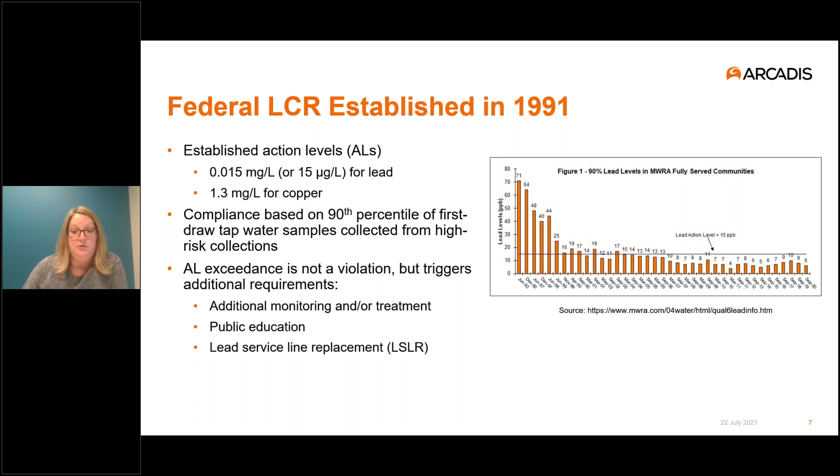It's been a really long road to get to the revisions. Really starting in 2004, there's been a national focus since the EPA decided to assess lead levels across the country following the detection of lead levels in Washington, D.C.'s system. Before Flint, there was Washington, D.C., and that was a very big crisis with lead in the water as well. Since then, we've gone through many stakeholder processes and additional analysis to better understand how we can improve this rule.

So now the revisions are finally here. They were officially released in the Federal Register on January 15th of this year. There is some uncertainty around the current administration - they are opening a comment period and doing some additional review, so some of the implementation dates are not completely clear right now. We'll go through that on the next couple of slides and show what we're anticipating based on the dates that have been published. Regardless, it's not expected that the rule will be pulled back and reverted to the original rule.

So I do want to stress that there's a lot in this rule. There's a lot to get started on, so don't wait to begin implementation of some of these things.

Going back to the overall objectives of why EPA updated this rule: they wanted to improve public health through a more proactive and holistic approach, focusing on earlier action to reduce risks, largely around lead in drinking water versus copper. In addition, the revisions improve transparency and communication to better protect children and families and give them the materials to better protect themselves from the risks.

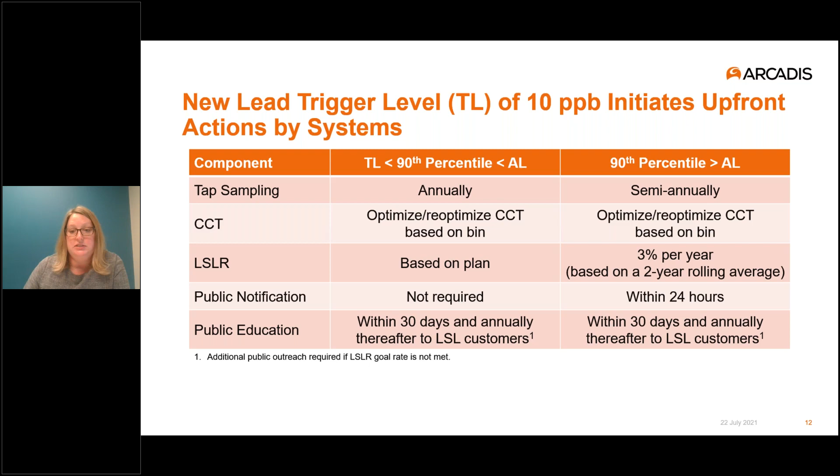It also introduces a trigger level of 10 parts per billion that wasn't in the previous rule. You can see that on this slide here. That trigger level is designed to compel systems to take more progressive actions before exceeding the action level. It can include more tap sampling, optimization or re-optimization of corrosion control treatment, full lead service line replacement based on a predetermined goal rate, an annual notification to customers about your lead service line replacement program, and opportunities to replace their lead service line. We'll talk about those in more detail as we move through the presentation.

Another big change is around notification. Given that there can be adverse health effects as a result of even short-term exposure to lead, EPA has changed 2 components. First, exceedance of the lead action level now triggers a Tier 1 public notice. So all systems must provide notice to all persons served by the system within 24 hours, similar to an E. coli situation or other acute health risk.

This is a little bit of a challenging message to communicate to the general public. The exceedance is not based on a single value, right? It's based on the 90th percentile, and 15 parts per billion is not necessarily a health-based level. So there will be some samples potentially above that level that were collected earlier in the monitoring period.

So to close that gap, EPA is doing 2 things. First, the notification has to be performed within 24 hours of receiving and calculating your 90th percentile lead level. So as soon as practicable, after you collect your data and calculate the 90th percentile, that's when that has to go out, not necessarily at the end of the monitoring period.

Second, you must notify persons served by that tap sampled as soon as practical, but no later than 3 days, if the result is above the 15 parts per billion action level, and give them information so they can take action to reduce their risks. These are really short turnaround times on notification, so it's recommended that systems prepare in advance, including having notification templates complete and deciding how you're going to distribute the materials if needed.

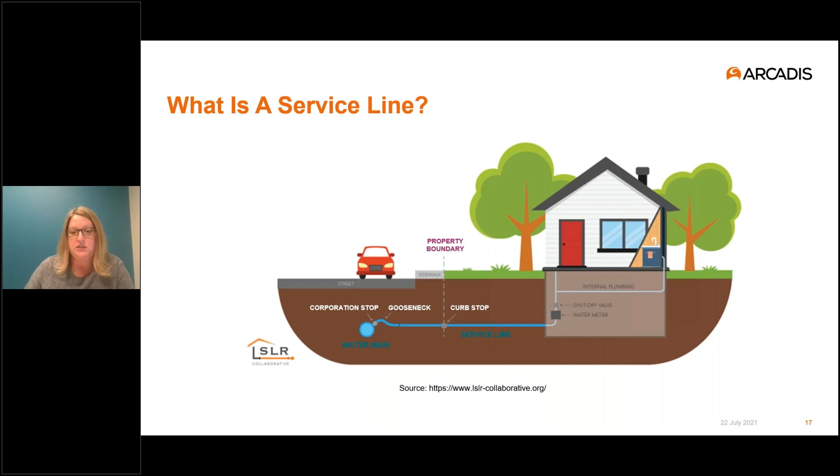So now that we've gotten the service line components straight, I want to dig a little bit deeper into the lead service line definitions in the new rule. Generally speaking, the service line is defined as the pipe between the water main and the building inlet.

However, for inventory and replacement purposes, this is how we're understanding the different material definitions. There are 4 categories. A lead service line is defined as a lead pipe anywhere between the connector and the interior plumbing, not including a lead gooseneck or connector. A lead status unknown service line is an unknown pipe material anywhere between the connector and the interior plumbing, again not including the connector or pigtail.

A new category in this new rule is the galvanized requiring replacement. This is a galvanized service line that is currently or ever was downstream of a lead service line as defined here, so that is not including a lead pigtail or gooseneck. And then finally, we have the lead connectors: the goosenecks and pigtails with non-lead or galvanized pipe between the connector and the interior.

So in what cases does replacing these count toward your replacement rates if you're triggered into replacement through an action level violation or exceedance? The lead service line only counts if all of the lead is removed, public and private side. If you just remove the public side, that's not counted towards your rates. Lead status unknown counts if all lead is found and removed, or if you determine there is a non-lead pipe. If you remove a galvanized line and any preceding lead, that counts as a replacement for the galvanized requiring replacement. However, replacing just the lead connectors does not count towards the replacement rate because, again, these are not defined as lead service lines.

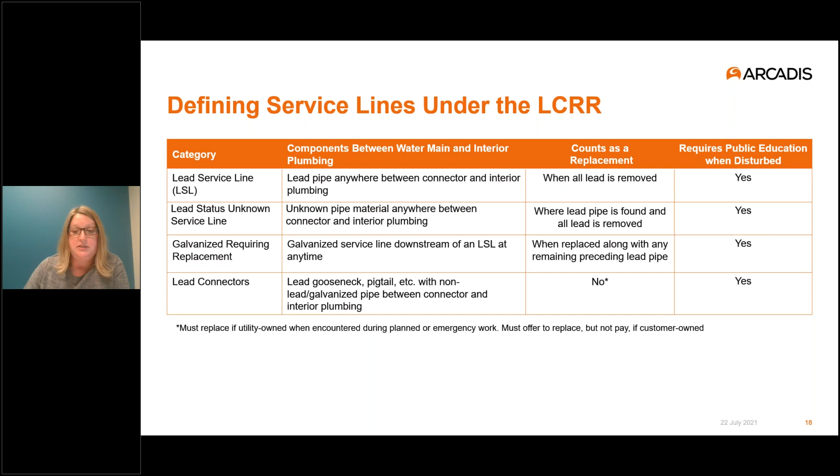All right, so we've come to our first poll. I want to see how many known lead service lines are in your system -- if you have none, 1 to 500, 500 to 2,000, or 2,000 or more. We'll give folks a moment to respond to that.

And while we're waiting for answers to come in, I have a question here. Do schools built after the 2014 Reduction of Lead in Drinking Water Act effective date require sampling as part of this rule? That's a good question, and the answer is no. If you have a brand new school constructed after the 2014 date, or if all of the plumbing in a school, including the service line, was replaced after 2014, you do not have to sample that school or facility.

Great, thank you. Eric, how are we looking with the poll? Do we have all of our answers in? Yeah, we have a good percentage here, so I'm going to go ahead and close that, and then I'll show the results.

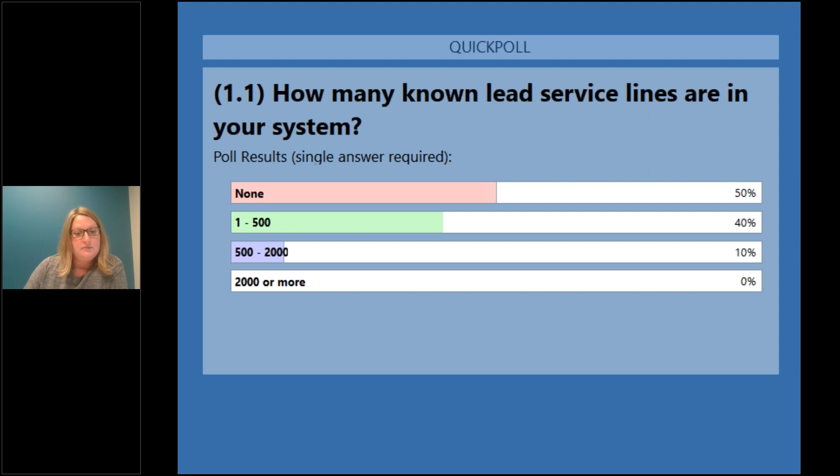Okay, so it looks like we have none at 50%, 1 to 500 is at 40%, and then 10% are 500 to 2,000. All right, so not so many lead service lines. That's good.

All right, so the first area I want to talk about with this is the lead service line inventories that are required. Under the final rule revisions, all systems must prepare a publicly accessible inventory of lead service lines and service lines of unknown materials, or demonstrate the absence of lead service lines by historical record or physical examination. The goal of this is to improve the system's ability to inform the public about the potential risks of lead and allow customers to take action to better protect themselves and their families.

The actual format of the inventory itself is flexible. It can be a list, a table, or a map. It does need to include some sort of location identifier. This doesn't necessarily have to be the exact address, but it does need to have cross streets, something that your customers can look at and understand if their house has a lead service line, or for example, a renter.

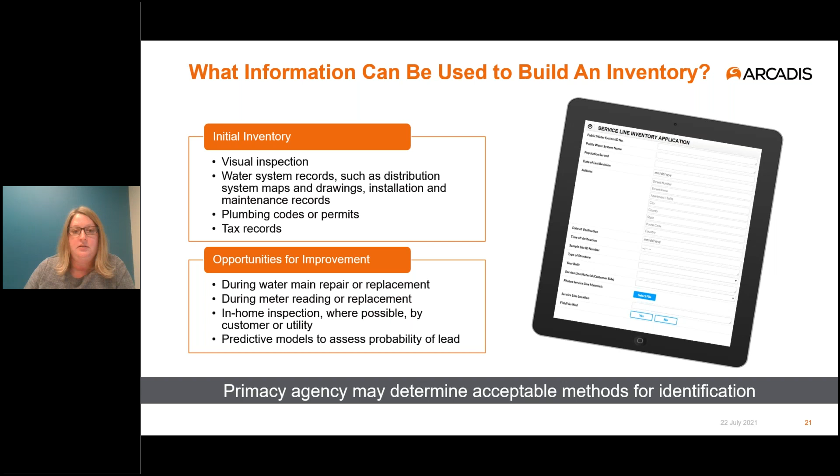If your system has any number of lead service lines, galvanized requiring replacement, or lead status unknown service lines, you must also develop a full lead service line replacement plan and submit that at the same time as the inventory, which right now is anticipated to be September 16, 2024.

The lead service line goal rate is something that's agreed upon with your primacy agency, so OEPA. Keep in mind, submitting that plan right before the deadline with no interaction with the state is not feasible, so you want to get the communication going sooner than that. Also, your EPA regional administrator may step in and adjust the rate, including setting a higher rate where they determine that it's feasible, even after the states have primacy.

Procedures to conduct full lead service line replacements: you want to know how you will coordinate with your customers prior to replacement, who is going to conduct the replacements—are you going to hire a contractor, or are your crews going to go out and do these themselves—and how they will be completed. There's a number of different methods for replacing lead service lines, so having a good idea of what will work in your system is good to know beforehand.

Medium and large systems need to have generally a recommended lead service line replacement goal rate in the event that a trigger level is exceeded, and that has to be approved by the state. This is especially important if you think your system might be at risk of exceeding the trigger level of 10 parts per billion. There are a couple of systems hovering right below the 15 parts per billion level, so they're not triggered into any action under the current rule, but when this takes effect, you may be triggered into it. So it's good to know where you stand.

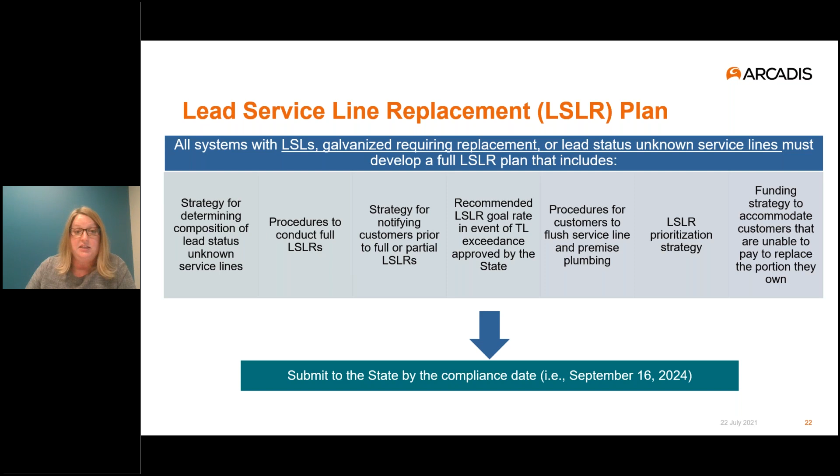There are 3 other significant changes to the current rule. First, test outs are no longer allowed. Under the previous rule, systems that exceeded the lead action level and were required to conduct replacement could collect a sample directly from the lead service line, and if it came back at or below the action level, it was considered replaced through testing. This practice is no longer allowed under the new rule.

Second, partial replacements are allowed only during emergencies or where the customer is unwilling, unable, or unresponsive, as part of infrastructure improvements such as a planned water main replacement. EPA is really discouraging this by not allowing partial replacements to count towards your goal or your mandatory replacement rates. They're hoping systems will make a good faith effort to coordinate with property owners to reduce the amount of partial replacements in the system—they really want to get that whole lead service line out. If a partial service line replacement is completed, you need to keep a record of the unreplaced portion in your publicly available inventory and continue outreach to those customers.

Another change is customer initiated replacement. This means if the customer replaces the private portion of the lead service line, the system is responsible for replacing the public portion within 45 days of notification of the replacement. The system can extend this up to 180 days to account for weather or resource related limitations—for example, if they get notice in December going into a hard winter—as long as they notify the state and work with the primacy agency.

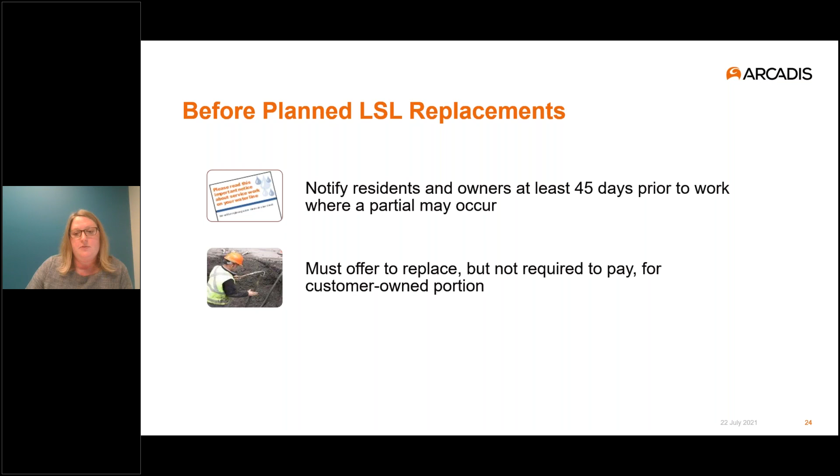Several other activities need to be completed when any replacement occurs for lead lines. The system has to provide education around potential for elevated lead risk mitigation, such as daily flushing procedures to remove particulate lead, high velocity flushing like we described earlier with that 30 minutes with all the taps open. They must also provide a pitcher, filter, and replacement cartridges for 6 months, and instructions for use immediately after replacement.

That's typically before the water is turned back on. Instructions on how to use the filter and replace the cartridges, and in the case of point of use devices, or like the Brita filters that attach right to the faucet, instructions on how to install those. There are some slight differences in timing on these, but generally this must be completed before the replacement is complete and before the water is turned back on. The only exception is when the system learns that a customer-initiated replacement where the system-owned lead service line was left in place occurred within the last 6 months. Then you need to complete within 24 hours of notification from the customer.

In addition to those, the system must also offer to collect a follow-up tap sample between 3 and 6 months after completion and provide results to the consumer. The tap sampling protocol for this follow-up sample is up to the system to determine, so this doesn't have to be that first draw compliance sample. Following this, you should update your inventory, and in the case of full replacements, update your sampling pool if needed, if that was a site included in your sampling pool.

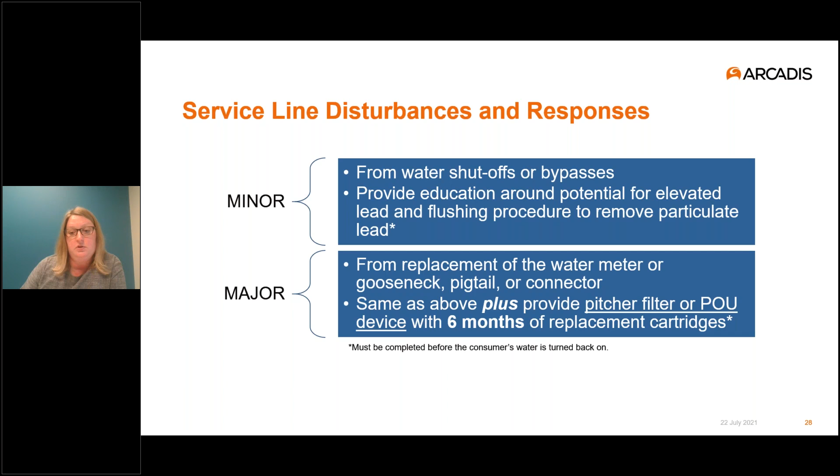So now I'll switch over to tap sampling. We've had quite a few changes in the new rule around tap sampling, and tiering is one of the biggest changes I want to talk about here. As you can see, EPA revised the tap sampling criteria to include 5 tiers.

This gives priority to the highest risk lead sources. There are some differences between community and non-transient, non-community systems. I'm going to focus on community systems for the purposes of this presentation. So tier 1 and tier 2 focus on the highest risk sites: single family structures and multifamily residences served by lead service lines.

The next tier is brand new for this rule. It includes galvanized service that is or ever was connected to lead. There's a slight difference here for sampling, as EPA also allows sampling for galvanized lines that are currently or known to be connected to a lead connector. So even though that doesn't count in your lead service line replacement, for sampling purposes, if it is currently connected to a lead gooseneck or pigtail, you can use that for sampling in tier 3.

Tier 4 are now single family structures with copper pipes with leaded solder installed before the effective date of the state's lead ban. This is an expanded definition compared to the previous rule, which included copper with leaded solder installed only between 1983 and 1986. So this is a bigger pool of sites.

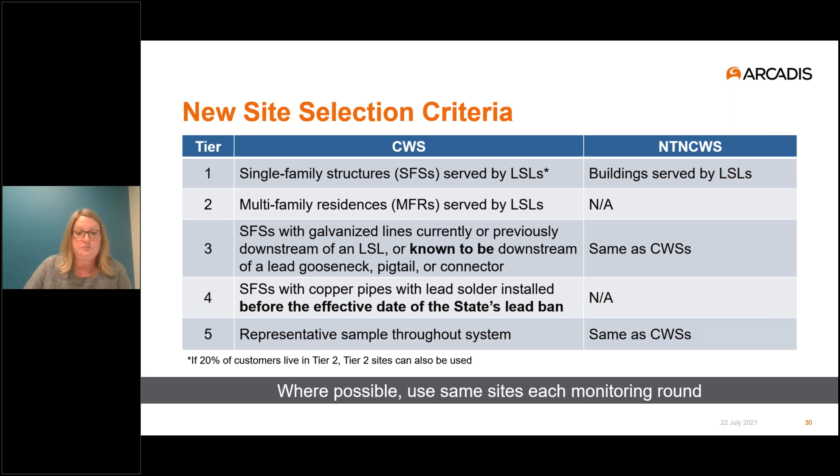Moving over to the new protocol, EPA did finalize modifications with respect to a few action items. First, systems are not allowed to direct any customers or samplers to conduct pre-stagnation flushing or to remove or clean the aerators prior to collecting a sample. I know this was standard practice in some cases to remove the aerator to get the sample - that is not allowed.

There's also a requirement to use wide mouth bottles, specifically greater than 55 millimeters at the mouth. Initially there was some confusion here - a lot of utilities were measuring their bottles and coming up with about 50. EPA has clarified this and says that this 55 millimeters can be the outer diameter of the mouth.

While the EPA does view galvanized lines in tier 3 as lead service lines for inventory, disturbances, and replacements, it does not view them as lead service lines for sampling purposes. So a little bit of complexity here. For tier 3, 4, and 5 sites, you'll continue to just collect that first liter and analyze that for both lead and copper.

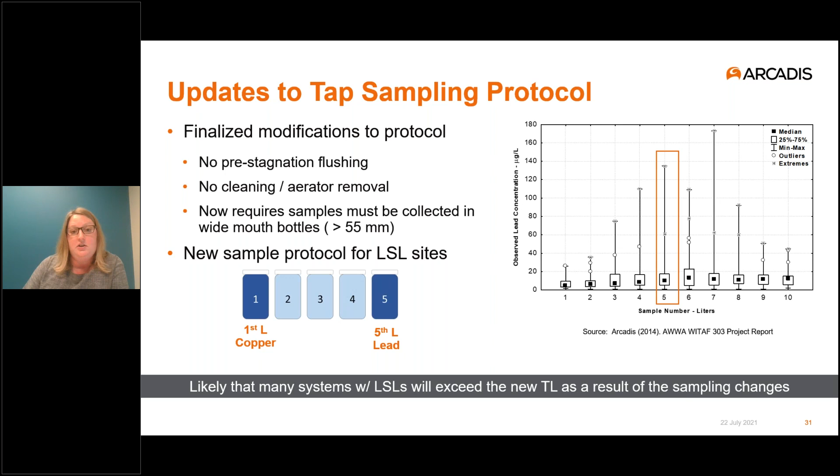This could have major impacts for a lot of systems, triggering you into some of the actions that we've already talked about in this presentation. It's really important to take a close look at your data, close look at your site, and try to understand where you'll fall.

So briefly, I also want to talk about the compliance calculation. Many of you are used to the 90th percentile calculation, but there's a couple strict instructions in the new rule for doing this. For a system where all compliance sites are tier 1 and 2, you're using all of the sites in your calculation. This is the same if you have only tier 3, 4, or 5 - you use all the sites in your calculation. It gets a little more confusing if you have a mix.

Lastly, on sampling, this slide provides some dates on the sampling frequencies. I did not update this slide based on the rule with the additional comment period, so this may be January 1, 2025. Again, it could stay as July 2024. We're waiting on additional guidance on dates for implementation on that. So first off, systems with lead service lines are going to begin using the new sampling protocol and going back to standard 6-month monitoring on this date, whether it ends up being July 1 or January 1 of 2025.

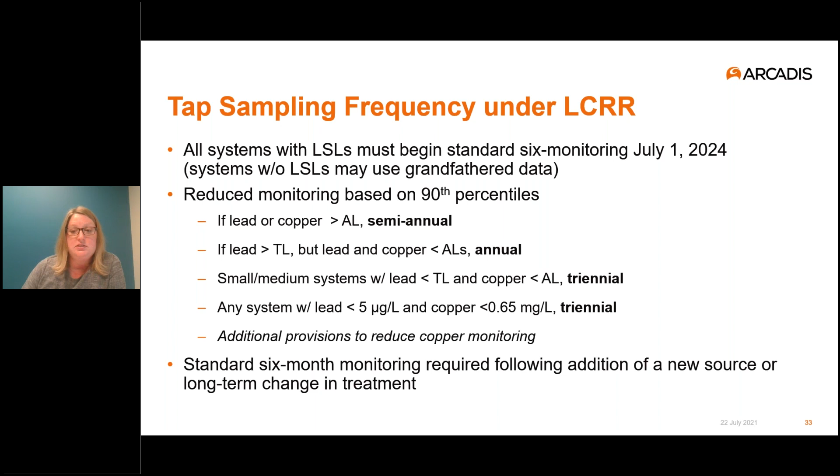All right, I'm going to move on to the last major topic, corrosion control treatment, and launch into my last poll. Does your system currently use corrosion control treatment? This would be any kind of orthophosphate treatment or control using silicates.

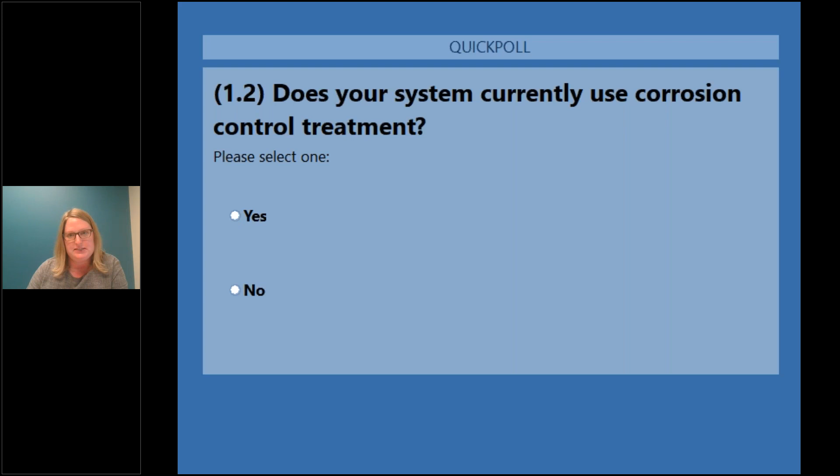All right, I'll try to breeze through these last slides. My last section is corrosion control treatment and some wrap-ups, so I'll try to go quickly. I finished the poll, and we have 79% that do use corrosion control and 21% that don't.

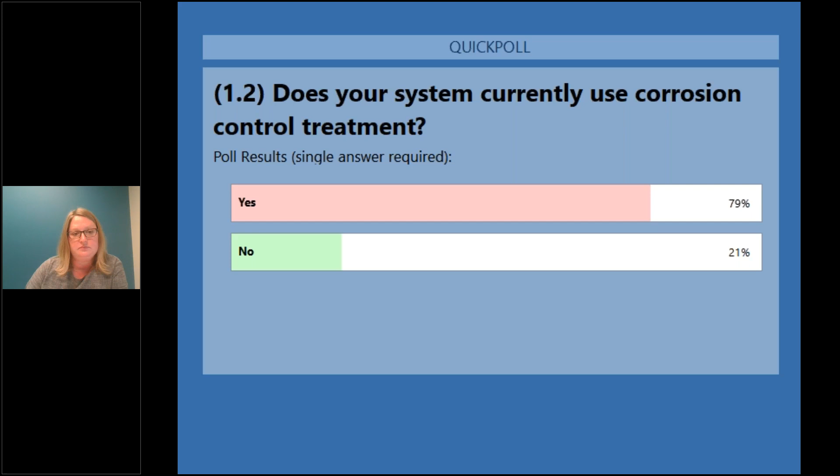Next, I'm going to go through a couple of flow charts showing action items based on whether you use corrosion control treatment and where your 90th percentile falls. For determining whether a corrosion control study is required, EPA opted for a bin approach, with bins based on size, presence of lead service lines, 90th percentile, and whether you currently have corrosion control treatment in place. I've tried to summarize that on these two flow charts, one for large systems and one for small and medium systems. We'll start with large systems.

If you do have corrosion control, which is most of those on the call, you have two different approaches depending on whether you're above the 5 parts per billion PQL level and the trigger level of 10 parts per billion, or over the action level. If you're below the trigger level with corrosion control treatment in place, the state might still require you to conduct a corrosion control treatment study, but that's at the state's discretion. If you're above the trigger level or the action level, you are required to conduct a corrosion control treatment study and move forward with installing the designated corrosion control treatment.

If you don't have corrosion control treatment in place and you're above 5 parts per billion, it depends on whether you have lead service lines. If you don't have lead service lines, note that they're not the only source of lead, so you're still required to recommend corrosion control treatment because other materials in your system are contributing lead to the bulk water, and you'd go ahead with installing that designated treatment. The state may also require a corrosion control treatment study. If you do have lead service lines and you're above 5 parts per billion with no corrosion control treatment, you will definitely have to conduct a corrosion control treatment study and install corrosion control treatment.

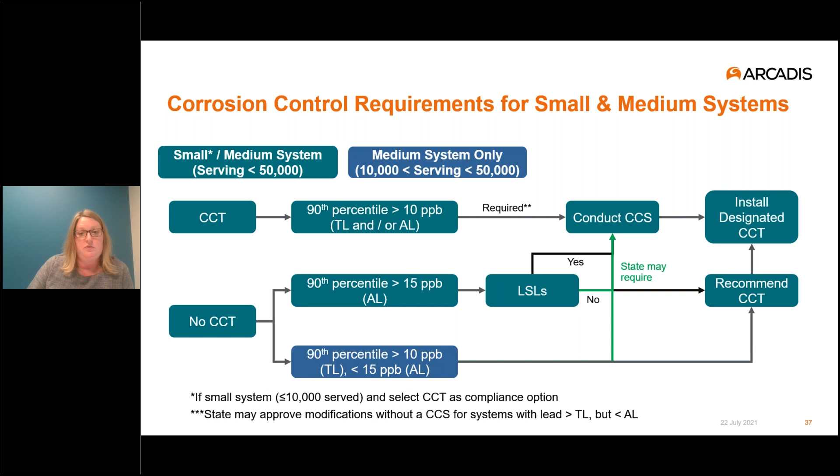For small and medium systems, this looks a little different, with more flexibility. If you already have corrosion control treatment in place but are still above the action level or trigger level, you're required to conduct a study and install the designated corrosion control treatment. If you don't already have treatment in place, it depends on your level: if you're above the action level and have lead service lines, you conduct a study and install treatment; if you're above it without lead service lines, the state may still require a study and installation. If you're between the trigger and action level, you'll be recommending corrosion control treatment and installing that.

So the requirements for these corrosion control treatment studies are pretty strict. They're similar to the draft revisions that were available ahead of the rule, but there's a couple differences. First of all, a study must consider pH and alkalinity adjustment. You must also consider orthophosphate at 1 and 3.

This study can be any of the following: a harvested loop study, or you can consider corrosion coupons if you don't have any lead lines. If you do have lead lines, you have to do a harvested material loop study, and there's a photo of this on the right for one that I'm currently running. Other options include a partial system test and an analogous system evaluation, similar to the current rule.

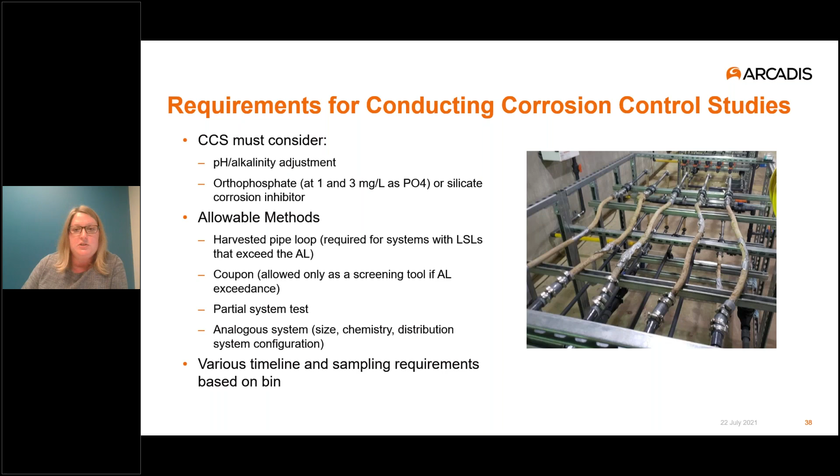There's a timeline for sampling requirements based on the bin that your system falls into and your 90th percentile results. If you have more questions about this, please reach out. I'm going to keep going in the interest of time.

There's also some flexibility for small systems. EPA recognized that small systems, specifically community water systems serving 10,000 or less, may not have the resources to conduct these studies. They'll need a little more flexibility, so they have a couple options on how to achieve compliance. This could include implementing the corrosion control treatment, implementing and maintaining point of use filtration devices - that means not only do you have to give your customers point of use devices, you are responsible for maintaining them - or replacing all lead lines within your system within 15 years or less, or replacing all lead bearing materials within 1 year.

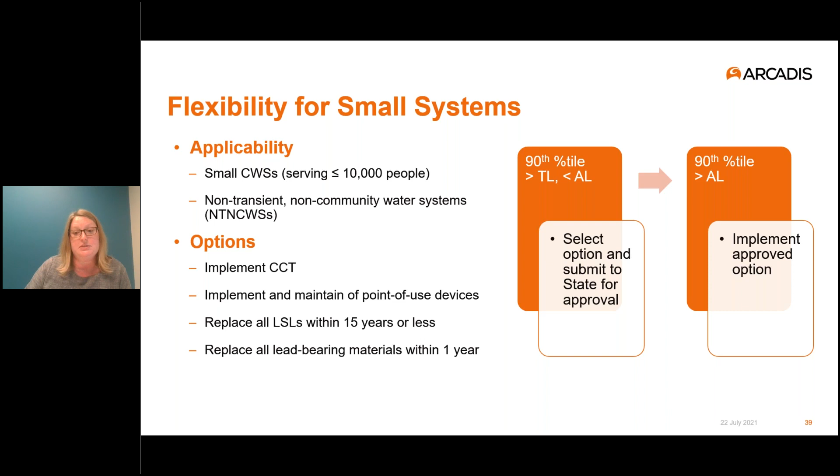So just a couple of final thoughts. I've got another poll in here. We want to launch that, just about what you find most challenging about the new rule.

All right, so while we're waiting for those answers to come in, I will ask another question. So with all of the requirements, is there any assistance or resources available as far as developing those notification material templates or sampling? I know that you mentioned training people outside of your organization. Are there any resources available to help with that?

Yeah, so unfortunately, there hasn't been a lot of published guidance from the EPA at this time. The primacy packages haven't been due yet, so a lot of the states haven't developed those materials either. We are really hoping that a lot of those come out, and I know that there's been a lot of comments to the EPA on the need for guidance. There's still a lot of clarification needed on the rule. There's so much in the rule, there's so much detail, and guidance is definitely needed. So unfortunately, there haven't been a lot of published guidance documents yet, but those are expected as we move through the implementation timeline.

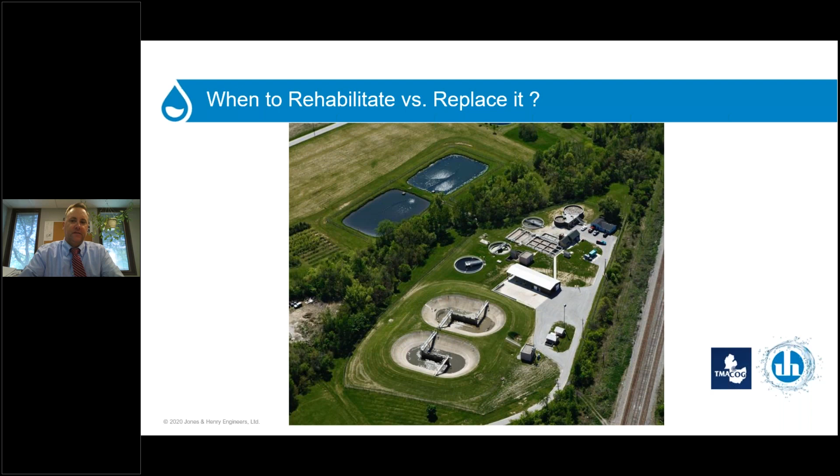So here's a picture of the existing, well, now replaced and gone wastewater treatment plant for the village of Carey. The big debate that came up when we first started this project with the village was, do we rehabilitate or do we replace it? That's where everything started. You know, as with everybody, they always look at it and say, well, we've already got an existing facility, it's easier to just rehabilitate, it saves money, it saves time, and everything like that. So we go through the whole analysis of that, and I'll walk you through that process.

So a brief history of the wastewater plant. As we see in this timeline, the original plant was built in '38, and that included the lab, administration offices, the screening and pump station, the grit facility, and aeration tanks 1, 2, and 3, and at the time, the chlorination and digesters.

So in '61, they did a plant modification, added a clarifier, another digester. In '88, they added aeration tanks 4 and 5, which increased the capacity of the plant. They added the EQ basin as well at that time, along with the effluent pump station and the tertiary ponds on the other side of the creek. That'll be a discussion point later on in the presentation.

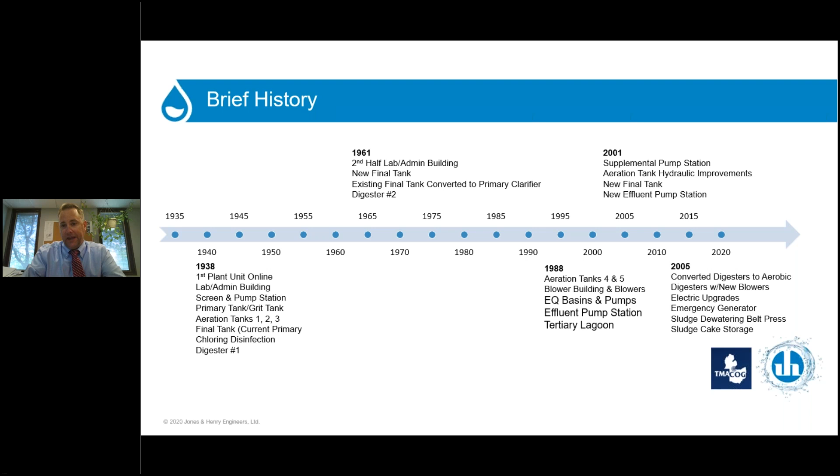So in 2001, we came in and did some hydraulic modifications to the plant. Basically, we put in step feed, trying to enhance the performance of the plant and be able to process as much of the flow as we could. Then in 2005, we focused on the solids aspect of the plant, rehabilitating and adding a belt press, rehabilitating the digesters, converting them to aerobic instead of anaerobic, and did some electrical upgrades.

So what are some of the challenges as we talk about rehabilitation versus replacement? What were the challenges with the existing plant?

One of them is the hydraulic capacity of the plant was very limited. They could only push about 2 MGD through the wet stream. Flow equalization was constructed as part of the '88 improvements, and then step feed around 2001 all contributed to the plant having an ultimate capacity of around 3 MGD. That's 2 through the main plant and 1 through the EQ basin.

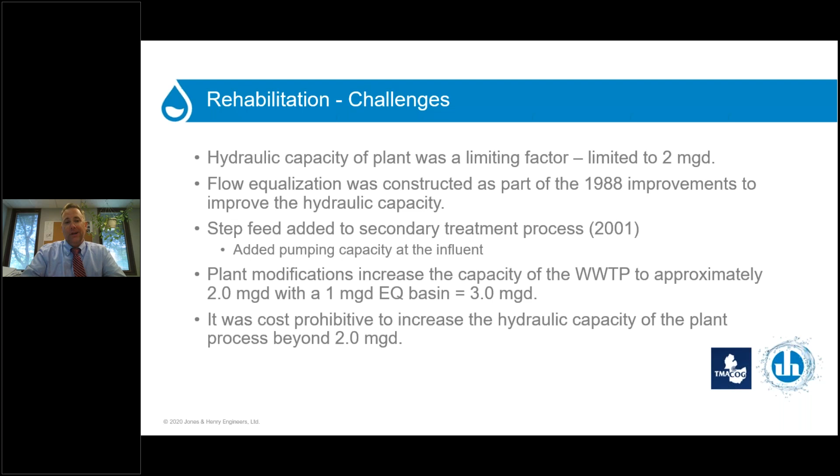The EQ basin had a high flow overflow that it would occasionally relieve, going through the tertiary ponds. But that was perhaps one of the biggest concerns the village had, was the hydraulic capacity of the plant. When we evaluated it, it was really limited. There really was no other way to expand the hydraulic capacity short of what was done in 2001 by adding step feed. So there was a significant bottleneck in the system.

Some of the other challenges with rehabilitation of the plant, and this was a pretty significant one, is site flooding. During wet weather, the plant site would frequently flood, and I'll show you some pictures later that'll give you a better sense of what the flooding meant. It would flood to the point that it actually would consume some of the tankage, affecting the actual ability of the plant to treat.

Another significant concern the village had was just the age of the existing wastewater plant. As I mentioned, the existing plant was built in '38, so much of the tankage was old with regard to concrete and structural integrity. Some of that was pushing nearly 80 years old.

The operators were concerned with regard to treatment capacity, reliability, and ability to continue operating over the next 20 years. Much of the equipment in the plant was already 20 years old. Even some of the most recent improvements, the EQ basin from '88, was pushing 30 years old. So the plant was just starting to reach the end of its useful life with a lot of the tankage as well as equipment.

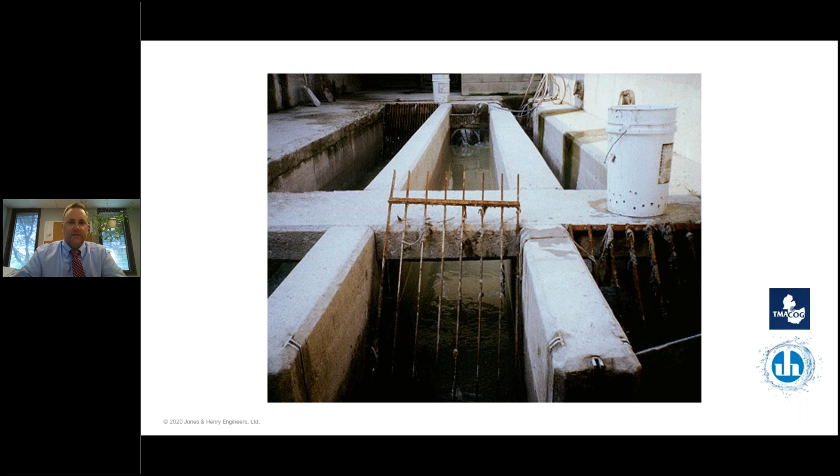Here's a picture of the existing influent screen. This is the headworks of the plant, the original plant. You can see the comminutor in the background, just very aged, very deteriorated, not well screened. I'll make a point of that here later on. You can see the bucket sitting there where they're constantly pulling organics out of the flow stream.

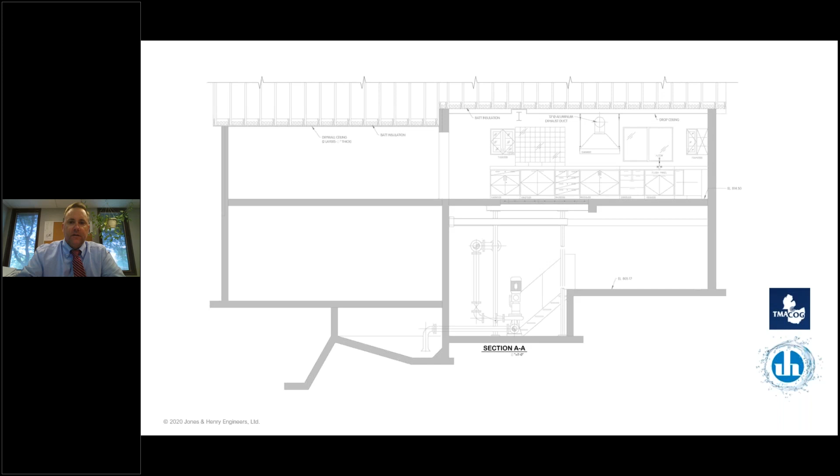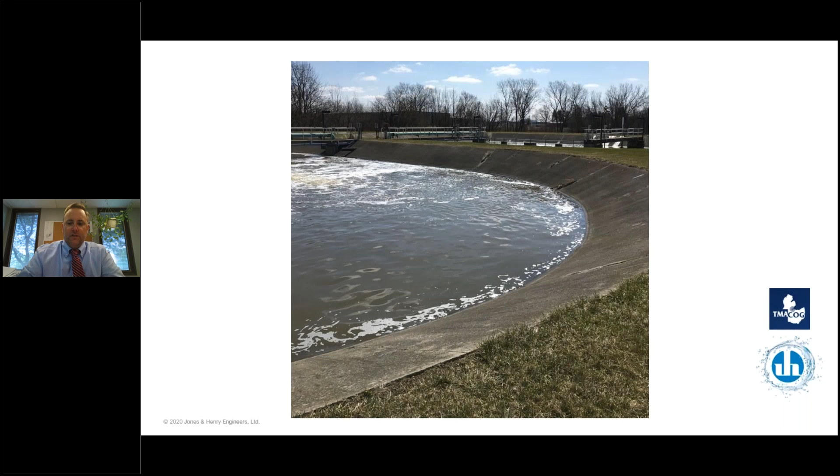Again, this is the EQ basin. You can see the cracking in the concrete in the background there. The inconsistency in the aeration is partly due to the buildup of grit in the tank, in the EQ basin. There's weeds growing in the cracks of the concrete and stuff like that. So again, it goes to exemplify the age and deterioration.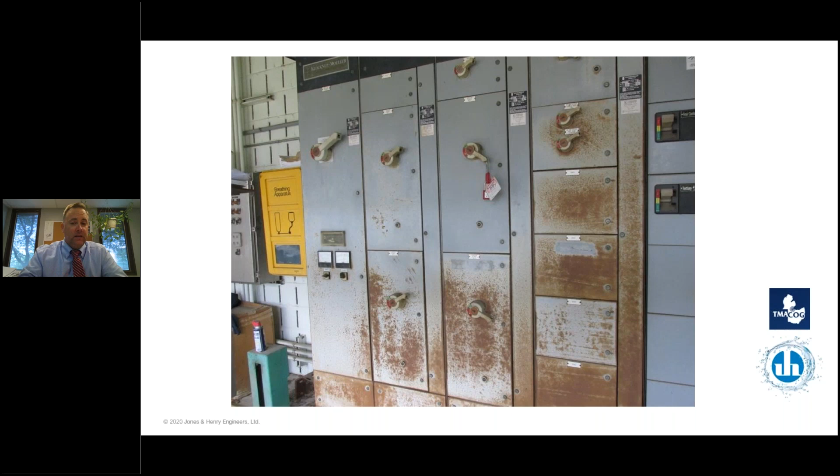It's been expanded, as you can see on the left side of the picture. Those couple of switches are much newer than the originals. And again, this equipment dates back to part of the original plant.

So here, this is a picture of the aeration tanks. In the background on the left-hand side, you can see a double pitched roof building — that's the chlorine contact tank. The blower building we were just talking about a minute ago is the pink building that's in the background there.

Again, you just kind of see the age of the aeration tanks. The light pole there is quite rusted. So just again, kind of exemplifying what the plant looks like so you guys can understand where the facility was at the time.

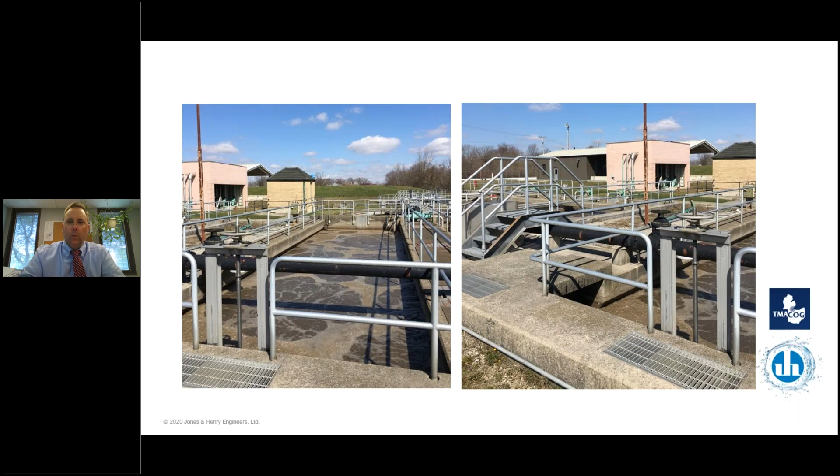In the left-hand picture in the foreground, you can see some deteriorated concrete. The concrete was starting to spall. These pictures don't quite do it justice as to the level of deterioration on some of the equipment and the concrete here. And again, these tanks are original to the plant. So these are 1938 facilities, pushing 80 years old at the time.

I'll make a note here. So I talked about the flooding of the plant a little bit ago. On the right-hand side, you see another picture of the aeration tank.

This would be aeration tanks 4 and 5, which are the newer ones, but you can see there's concrete deterioration. The ground is sloping back away from this aeration tank, from the front of the picture to the back, and you can see a little structure back there. They all sit slightly lower than these aeration tanks.

So while the aeration tanks never flooded due to the site flooding, this structure in the background and the clarifier immediately behind this aeration tank certainly did flood and frequently would flood and become overwhelmed. The floodwaters would actually get into that clarifier, and it provided no level of treatment. That is a pump station in the background, the square structure with the two pipes sticking up. That too would flood out, and obviously the pumps are submersible, they would pump, but you're getting creek water and floodwaters into that pump station.

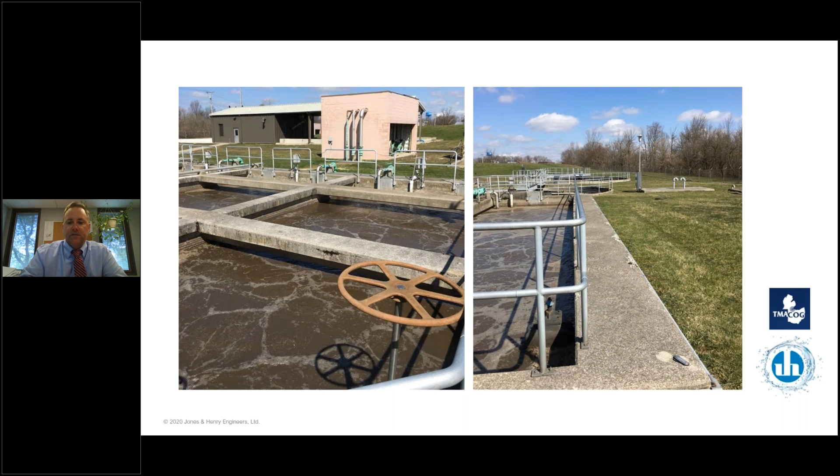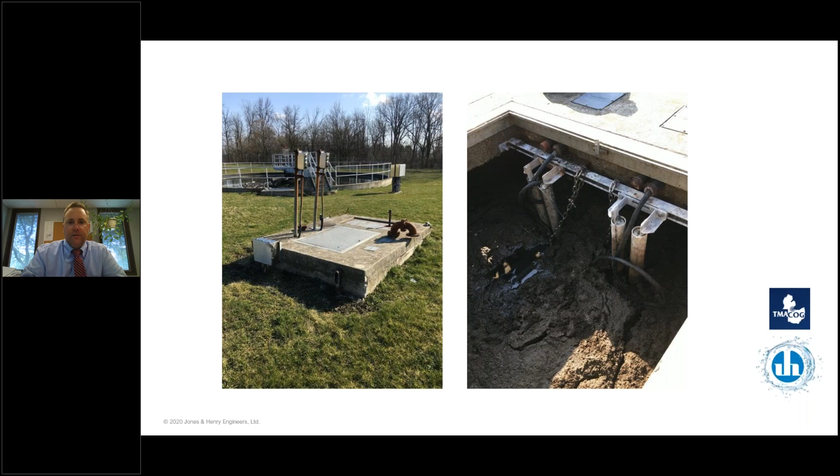Here's another pump station. This is the return sludge pump station. On the left-hand side is an overall site view. Again, this pump station would frequently flood. On the right-hand side, you can see the age and deterioration of the equipment, the pump supports and the conduits, just starting to corrode away.

Again, the left-hand side is a good picture, standing up on top of the digesters. You can see in the background the wastewater plant, a little closer view than the aerials. More importantly, in the front is the digester. You can start to see the concrete deterioration, the staining and rebar rust on the right-hand side of the left picture, and again, some concrete deterioration on the right-hand side picture of the digesters.

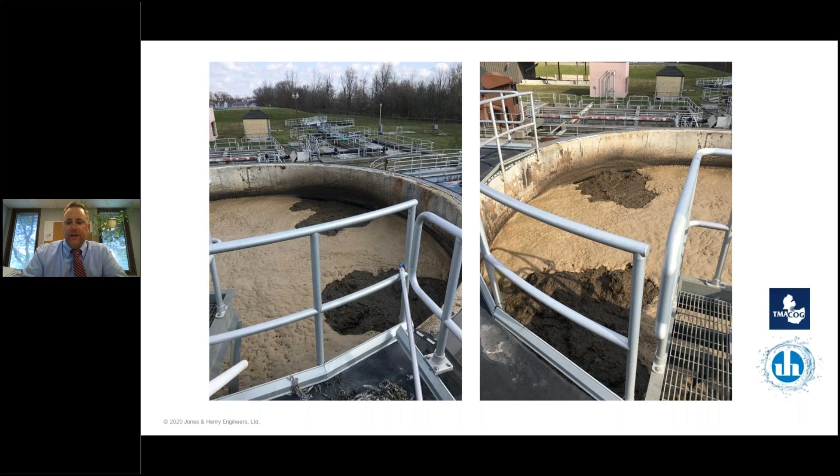This next picture is perhaps one of my favorites, and it'll come into play here in a little bit too. As I mentioned in the first photo, the headworks and screening of the existing plant was not that great, and here's an example of what happens when you don't have good headworks in a wastewater plant. These piles laying on the roof in the front next to the ventilators, and there's one in the background right at the edge by the handrail, are inorganics which make it past the screening process.

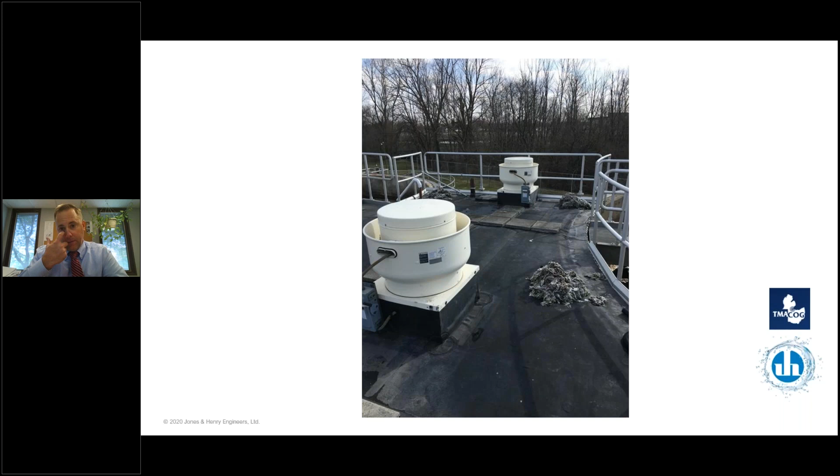Now, this digester is obviously the back end of the wastewater plant, the end of the process. So those inorganic materials are making it all the way through the entire treatment train and ending up in the solid stream in the digesters. It goes through all of the pumps, through all of the treatment processes, which is not good on all of that equipment. They frequently have to skim these out of the digesters.

This picture on the left-hand side is an example of the inside of the blower building. These are the blowers that are feeding the digesters, along with the electrical gear. It just goes to show you the confinement of the space that the village worked within. The picture on the right is just from a different angle, and the blowers are just out of the screenshot.

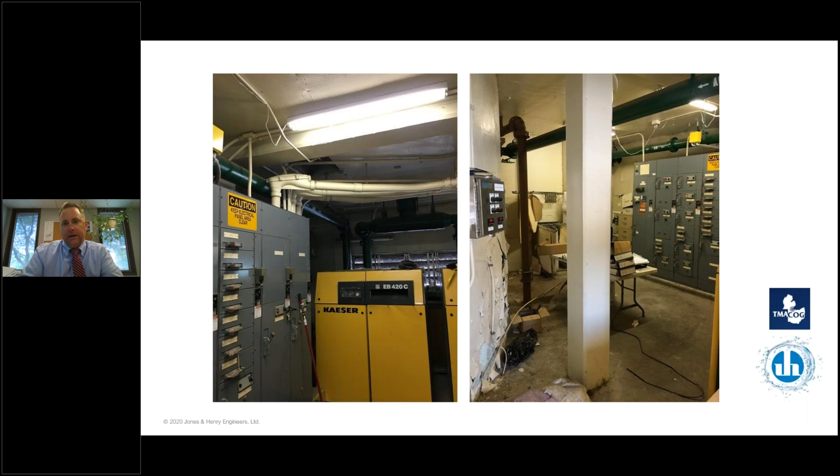So here we'll come up to poll question number 1.

Considering the difficulties and challenges that we've noted, how does your facility compare? You have the choices between worse than, similar, better than, and we have a new facility.

Okay, and while we are waiting for the answers to come in for the poll, Pete, I do have a question. Sure. Was there a specific tipping point? It seems like there were a lot of things, but what was it that convinced Carey that they finally needed a new plant instead of fixing things as they were going?

You know, there were a number of things, as you point out. And as I get into the analysis here in a few minutes, you'll see how the dollars worked out.

I think the tipping point really for the village was the fact that you could replace the equipment and get a new 20-year life, but unless you replace the tankage, it was still 80 years old. In 20 more years, at the end of the useful life of the new equipment, your tankage is now 100 years old. So I think that was really the tipping point. The other thing was probably the flooding was a pretty significant issue for them. There was really no way to get the existing facility brought back up above flood levels.

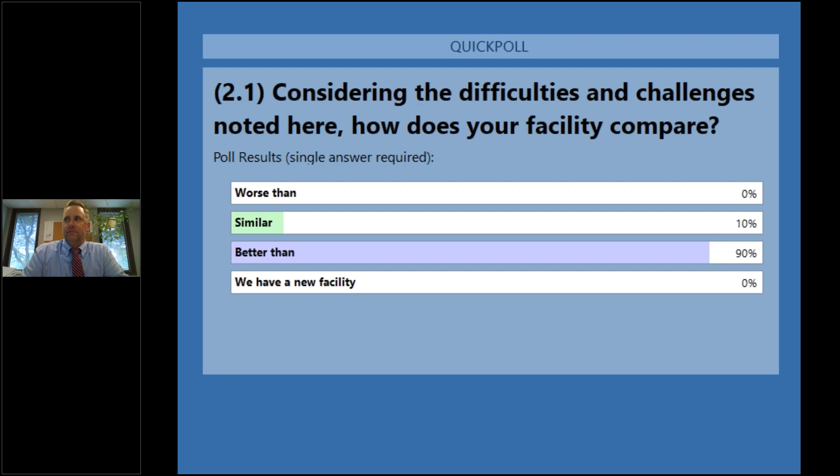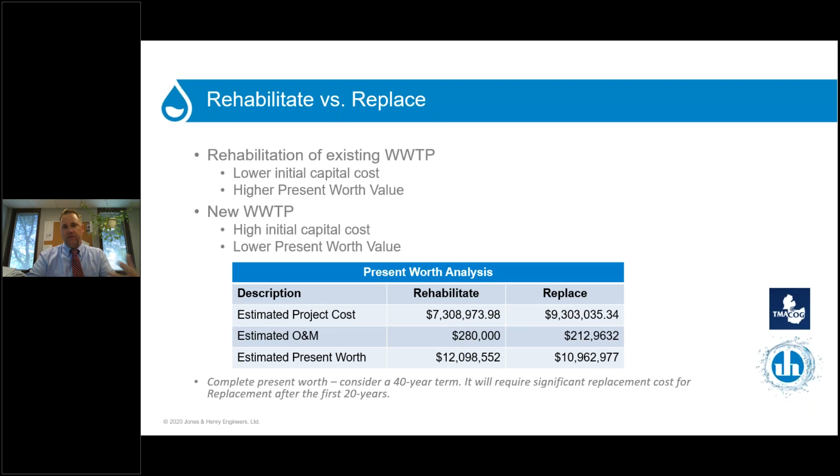So we got into the discussion quite extensively about rehabilitation versus replacement. And again, just going back, the initial capital cost on both these options are relatively close. We're talking $7 versus $9 million. So it was a very serious discussion about is the extra $2 million worth it? And that's what the discussion came down to: why did ultimately the village commit to the replacement of the facility? And again, it goes back to that design life of 50 years on the tankage.

And as we all know, wastewater facilities typically keep things way more than the 50-year design life, Carey included. They had tankage that was 80 years old. After the debt retirement, there was salvage life or service life remaining on the tankage. Design life of equipment was 20 years.

Another significant issue was the hydraulic capacity. They really wanted a facility that could handle their design flows all through the main wet stream with no flow equalization, and then they wanted to eliminate overflow events and bypasses. So all of the new facilities were constructed above the 100-year flood elevation, again a significant concern for them. This allows proper operation during flood events and increased reliability with regard to treatment.

The existing plant had been worked on so many times that there were a lot of modifications to the facilities. So working within a facility like that, there would be more conflicts with underground electrical trying to rehabilitate the existing facility. A new facility would be a much cleaner installation, much more efficient, and much easier to maintain going forward in the future.

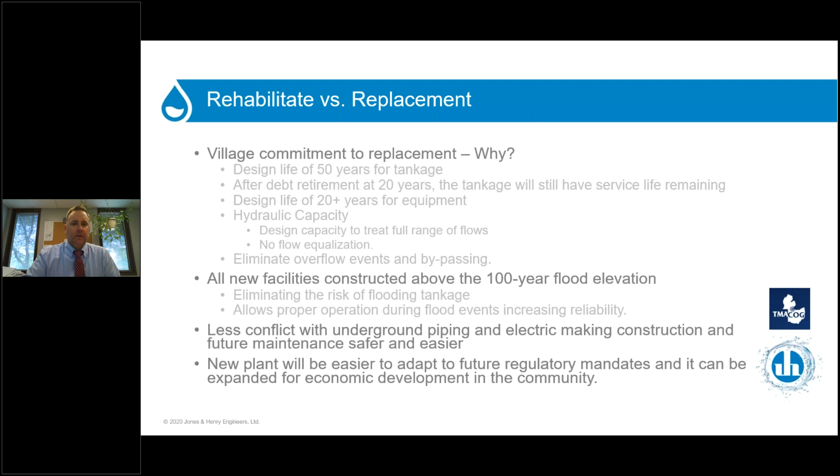The other thing too is that the new plant would be able to adapt to future regulatory mandates and expand for economic development in the community if such an event was to occur. So these are all key considerations that the village took into account, some of them more engineering analytics, but some of them just on the softer side.

So the village makes the commitment to proceed with a new plant. What do they want to build? Well, the first thing is Carey is not a CSO community. However, they do experience high flows due to excessive I&I in their collection system.

Due to the hydraulic limitations of the plant, there were some challenges with trying to figure out how big of a plant to build with regard to the flows, because the plant—was the sewer backing up and giving the appearance of excessive flow because the plant didn't have capacity, or were the flows excessive, well in excess of what the plant could handle? So it becomes a little tricky when you try to analyze that in order to determine the sizing of a plant.

So for the new plant, ultimately what we came down to in the flow analysis was their annual average day, which at the time of design was about 0.6 MGD. Their dry weather flow was down as low as 0.25, or 250,000 gallons a day. But their peak flows in our analysis were in excess of 3 million gallons a day.

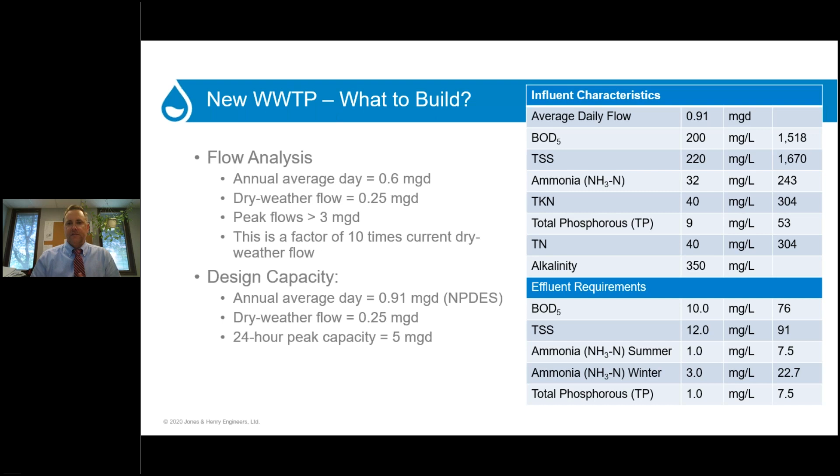The EPA came back after several meetings, and basically we were going to get best available technology limits, which their effluent limits are there. For BOD and TSS, ammonias and phosphorus, the target was 1, with likely going to be seeing in a few years a 0.5. So I think those are very typical, but the key point is the flow.

So what to build at the wastewater plant? Through discussions with them, fine screening was a concern, as you saw from the pictures of the existing digesters. Grit removal was a concern as well; they do have a lot of grit settling out in their tankage. The existing plant had a primary tank, and we think that was acting more like a grit tank. Then the oxidation ditch, and I'll go through each one of these as to why we selected them, and then final clarifiers, UV disinfection - they wanted to get away from chlorine - and some solids handling improvements as well.

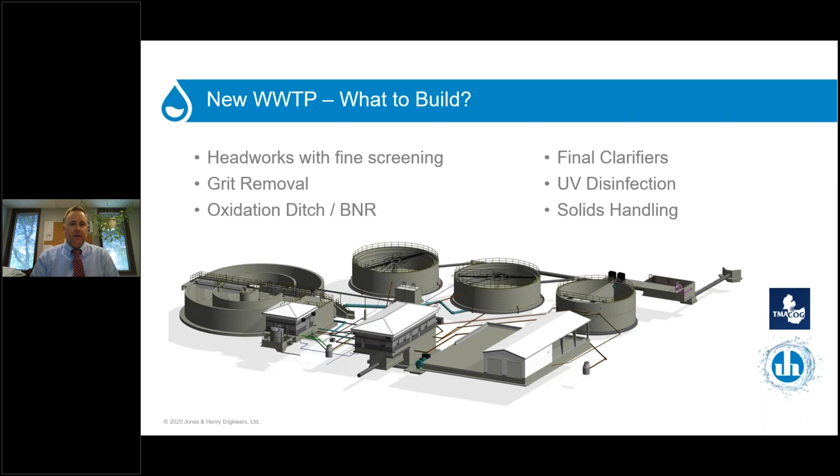As we start to walk through each of the unit processes, the headworks screening - why screening? Well, as you can see from the pictures, they're mostly a gravity system, so they get a lot of inorganics coming down. There are not a lot of pump stations in the system where the inorganics and organics get ground up and macerated in order to pass through the plant a little easier.

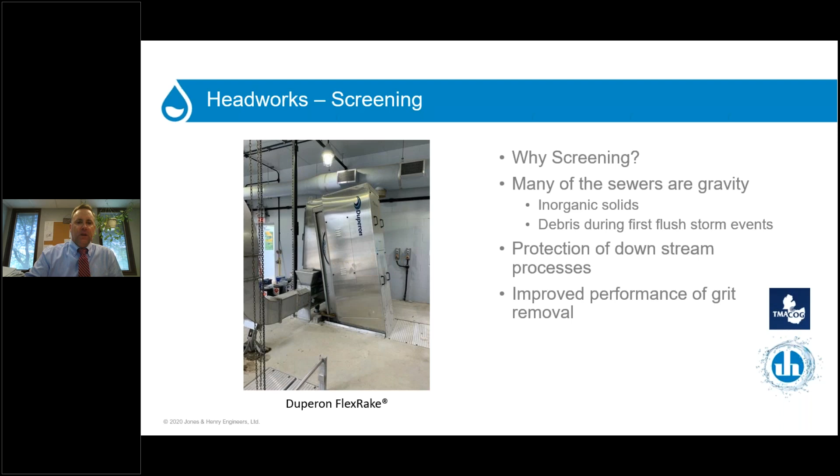The other thing too with screening - the village hasn't had good screening or grinding in quite a long time, and it was creating havoc on the plant. It protects a lot of the downstream equipment when you have screening, so screening is extremely important. It also cleans up your sludge on the back side. The village currently goes to landfill, but if you're doing land application, screening is extremely important there as well. The other key thing is they were putting in a grit system, and a grit system will perform much better if you can get that organic material out of the way - it helps the performance of the grit system.

We mechanically clean the bar screen, it's a 1/4-inch bar spacing. The mechanical screen is designed for a 5 MGD capacity, approximately 3.4 feet per second, with a head differential around 3.5 feet at 25% blinding.

There is a bypass channel with gate controls, sitting right behind the screen in the picture. The mechanical screen has a washer compactor and discharges up into a dumpster. The washer compactors are very important - they tend to wash all of the organics out of the inorganics and separate them well, and the organics are deposited right back through the drain into the flow channel for treatment. The inorganics are dumped into a dumpster and hauled to landfill with their other solids.

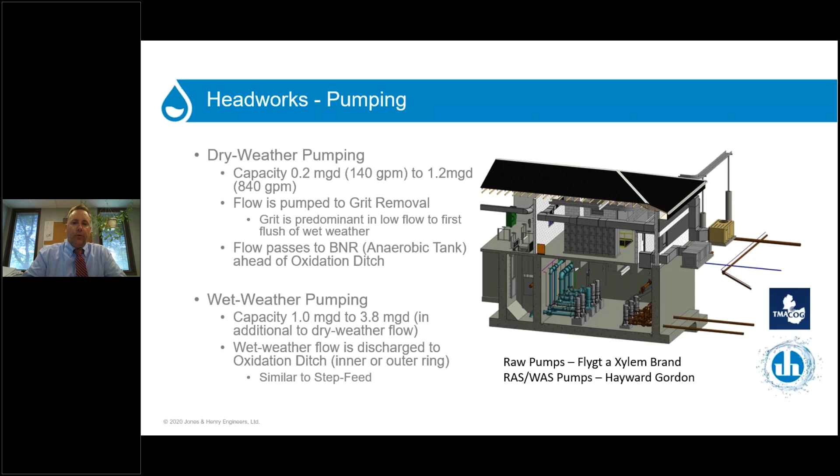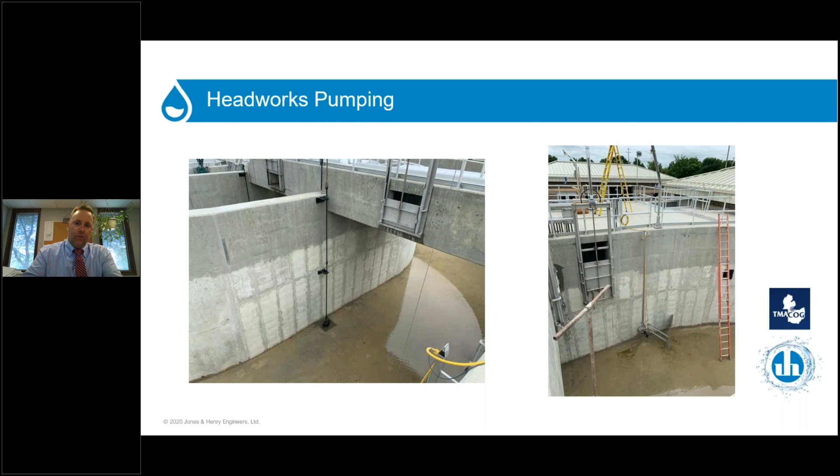Here's where the headworks pumping discharges. The picture on the left-hand side shows where the wet weather pumps discharge, into a flow channel sitting across the oxidation ditch. In the foreground is the outer ring, and in the background is the inner ring. Typically the wet weather flow goes to the inner ring, again as that step feed type process. In the right-hand picture you're standing on that flow channel, looking back at the anaerobic tank, with the grit system in the background behind that crane. The flow from the grit comes up into the grit channel, into the anaerobic tank, and then flows into the outer ring of the oxidation ditch.

So why grit removal? This is where the village was really integral in the whole design process. They were really engaged, and I encourage other owners to be very engaged with your design professionals, because you bring forth a greater knowledge than we have. We can dig into the mechanics and nuts and bolts of a plant, but you have the experience with operating it. The village of Carey knew they had a grit problem, so they pushed to have grit removal in this facility. They have older sewers that allow a lot of deposits and grit to come in, and they experienced deposits in the primary tank and the EQ basin before.

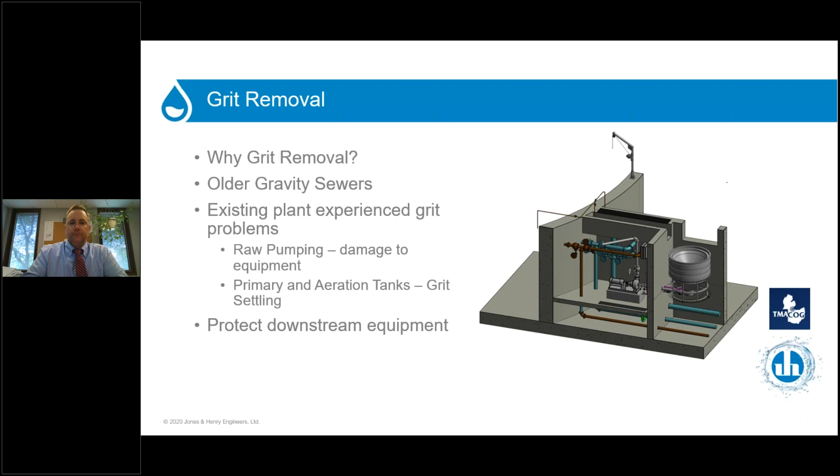On the left-hand side you can see the grit system we installed, which is a vortex-style grit system. We put it right up front in the plant to help protect a lot of the downstream equipment. In this picture, right in the dead center, you can see the round circular tankage, which is the actual grit concentrator. The flow comes into that, the grit concentrates, the velocities change, and the grit drops to the bottom. Flow rises up and goes to the right-hand side into that open tank, which is the anaerobic tank. On the left-hand side you can see the grit classifier.

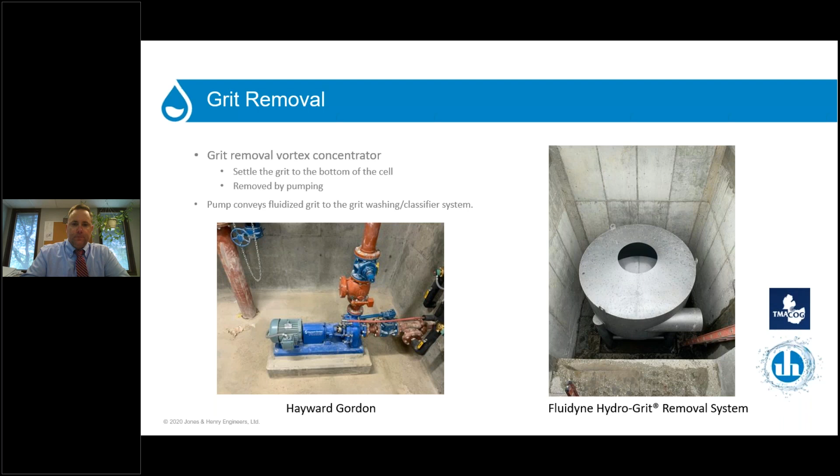This picture on the right-hand side again shows the grit concentrator. The flow comes in through the little pipe on the right-hand side, swirls around inside, the grit drops to the bottom, and the flow comes out the top side and over the weir into the anaerobic tank sitting in front of us in the foreground. On the left-hand side is the grit pump. The pipe goes through the wall and connects into the bottom of the vortex, which is on the right-hand side. This next picture shows it in operation, looking at it from a different angle. The little circle on the right-hand corner is the opening in the top of the concentrator, with flow coming out of it and passing over the weir into the anaerobic tank.

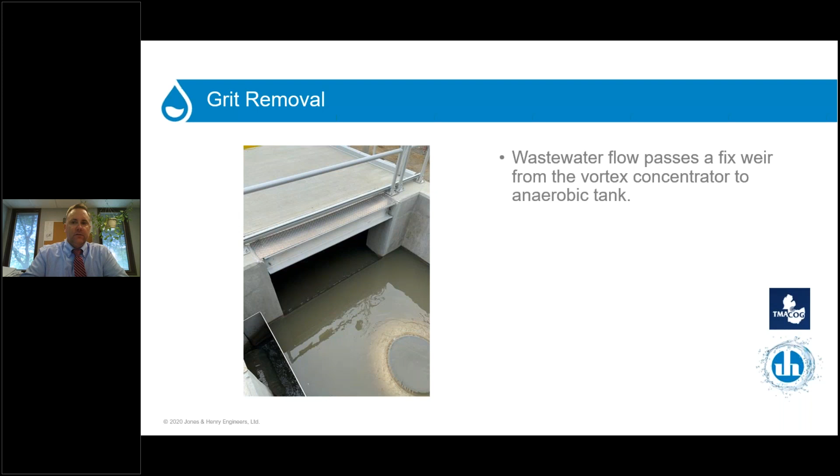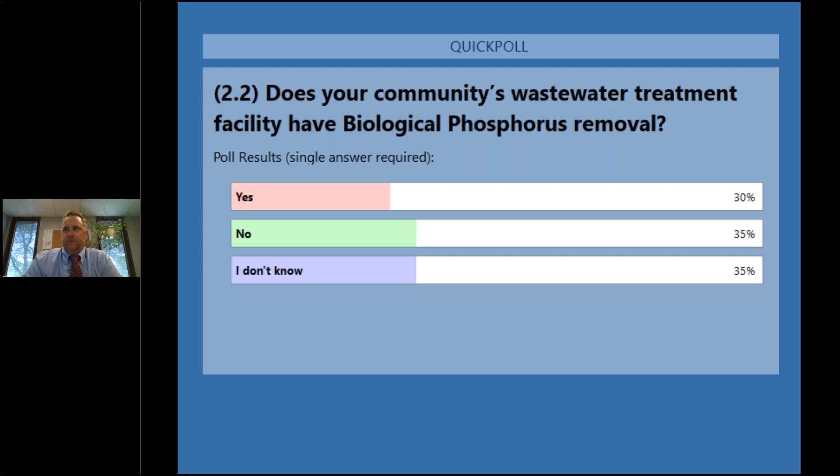Eric, you're muted. Sorry about that. So we got a good amount here. Very even split: 30% yes, 35% no, and 35% I don't know. Okay, interesting. Good.

So again, the reason for my poll question is because in Carey, having an active owner, actively engaged and participating in the design process, really helps a design professional deliver what is best for the village and for the operators at the facility.

So what we did was we did some initial testing on phosphorus and discovered that their phosphorus comes in, on a scale of high to low, relatively high. They're coming in at almost 9 milligrams per liter. Some days are lower, some days are higher, but for the most part they were coming in at 9.

So that begged the question of, okay, how are we going to treat this? And it led into the decision behind why we added biological nutrient removal to this plant.

Another key factor in the treatment of phosphorus was the alkalinity, which I had mentioned earlier. The alkalinity in Carey happened to be a little bit high, and as a result, we found that some alums, not all of them, but some, generally don't react well when the alkalinity is off. So Jones and Henry, as well as the village, looked at this, and they decided they wanted to go to iron salts, ferrous and ferric chlorides and stuff like that, in order to treat for the phosphorus.

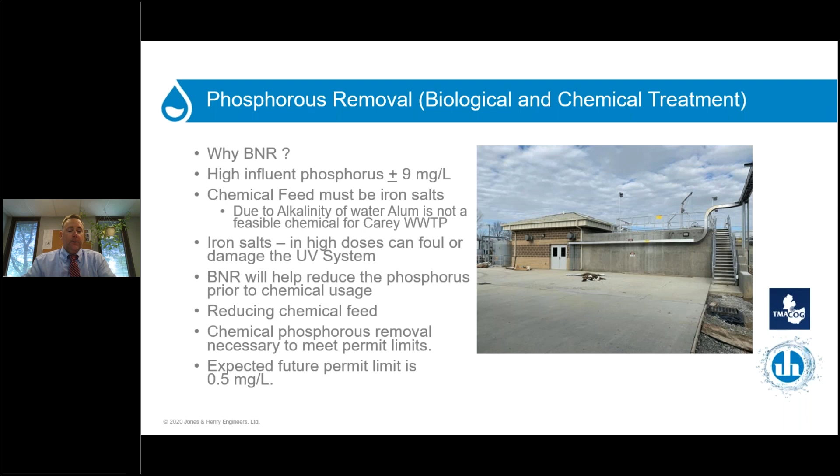So, follow up to this: since the plant's been in operation, the BNR process has actually been able to get their phosphorus down to just about a 2 as of right now. They're still working to dial it in, but they're going from a 9 to a 2 with the biological nutrient removal. So now what they're doing is polishing with chemical feed from the 2 down to 1, or in the future possibly 0.5. That significantly reduces that chemical feed rate.

So as we move on, talking about what we were deciding to build and what the treatment processes were going to be, the secondary treatment process was going to be an oxidation ditch. Why an oxidation ditch? Well, again, the village wanted to eliminate the tertiary ponds. They also wanted to eliminate the EQ basin in order to simplify and streamline their entire treatment process.

And of the processes we looked at, the oxidation ditch would perhaps be the most effective at that. An oxidation ditch is capable of a swing in flow of up to 10 times the dry weather flow, which we have. We swing from a dry weather flow of 250,000 a day up to almost 5 MGD.

The oxidation ditch also includes an integral BNR process. It's a simplified wet stream process. It incorporates step feed for stormwater flow during high flow events, and also protects the BNR process to keep it functioning during those high flow events. Integral to it is denitrification to achieve reduction of nitrogen and nitrate nitrogen. So it's kind of an all-in-one package where you can do it all in one treatment train rather than having multiples.

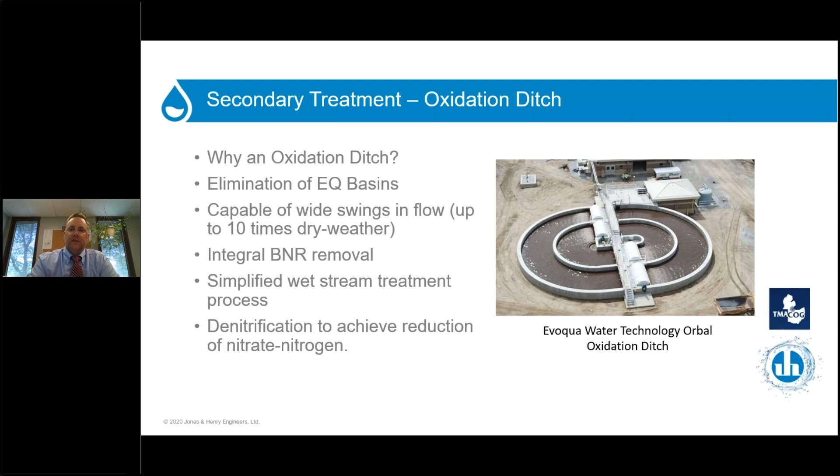The clarifiers are 45-foot clarifiers, each with a peak flow rate of 2.5 MGD. The two combined get the 5 MGD at the plant. Solids loading rate for the clarifiers is 30 pounds per square foot per day, and the overflow rate is 800 gallons per day per square foot. That's a little low, which goes along with the guidance since they're feeding chemical and phosphorus removal potentially, so they tend to oversize clarifiers a bit because of that.

The clarifier has something the village is very fond of, and has had on past clarifiers - a brush system to keep the weirs and baffles clean. So they were very enthusiastic to have that again.

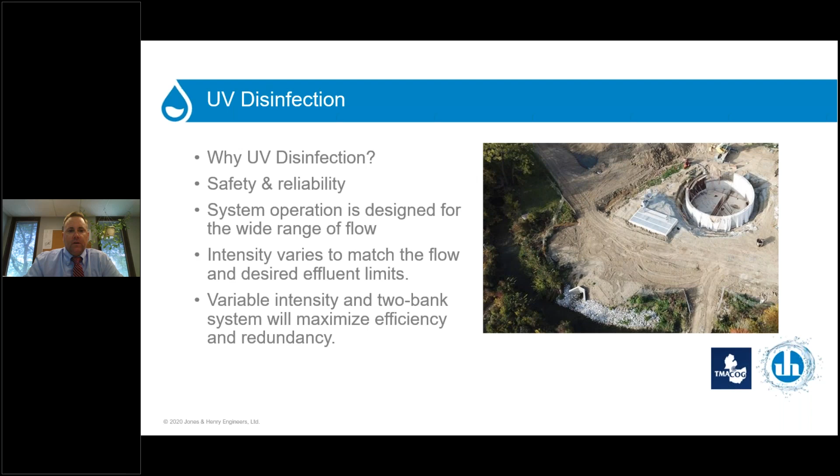Some key considerations with the UV disinfection on a wastewater plant. Number one, it's an outdoor facility. I know some facilities like indoor enclosed facilities, but for a UV structure, it saves cost and also cuts down a lot on nuisance insects. You get a lot of flies and insects floating around on the effluent side of a plant, and when you put a building up, those tend to grow and accumulate inside it. It just becomes a nuisance.

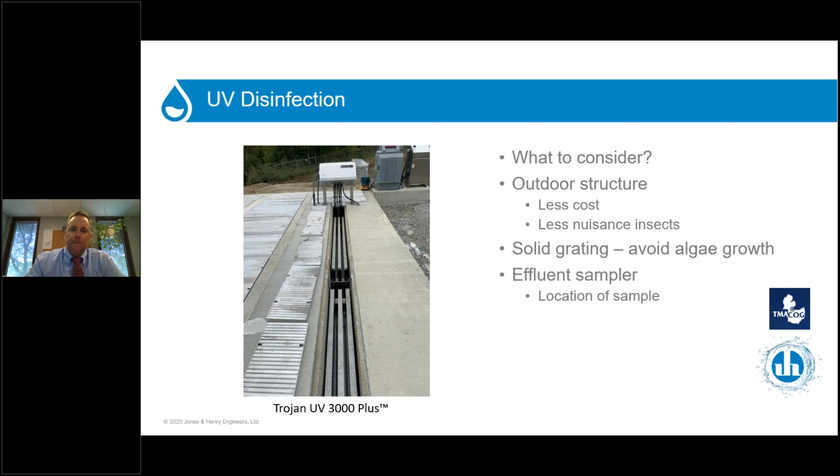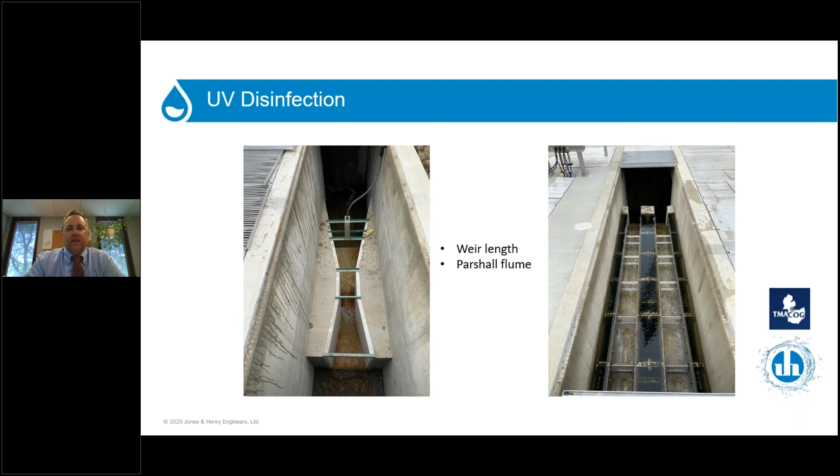Here's a picture of the flume, which is the other parallel channel in this structure. On the right-hand side of the picture is the long weir required to maintain level in the UV, because the UV needs to be submerged at all times. As the flow varies, this weir allows a very slight fluctuation in the depth of flow, even though the flow increases substantially, and that keeps the submergence on the bulbs.

So as we get downstream of the UV, we also moved the effluent point and the discharge point, which required some additional permitting and stuff. But it was important because the village didn't want to pump wastewater flow back over to the other side of the creek to flow through the existing flume and meet the existing discharge point. So they kind of wanted to abandon everything on the opposite side of the stream. That's why the discharge point was actually moved over to the same side of the creek as the wastewater plant.

So as we got into some of the most recent improvements at the Village of Carey was the solids handling. Solids handling had been recently improved about 10-15 years ago. They had put in a sludge holding building where the belt press was located and a dry storage pad. So the belt press, although at the end of its useful life, the building and everything else was relatively new. So they wanted to maintain that, but they also wanted to continue with the solids handling process because the village hauls all of their waste sludge to landfill.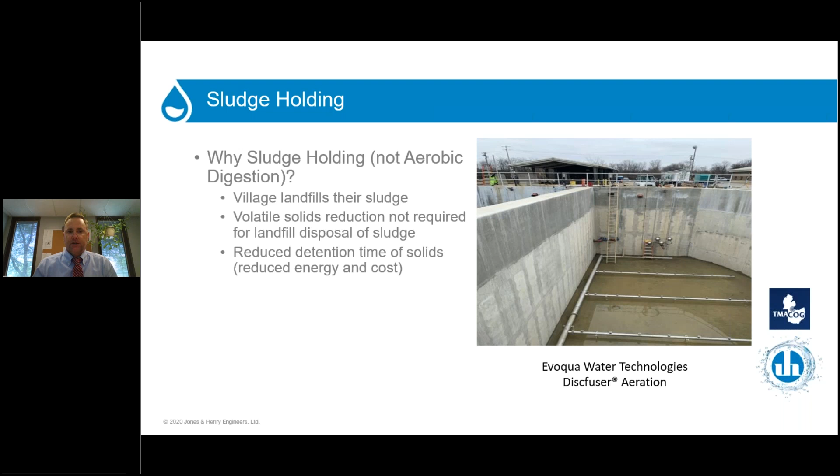So because of that, and they had no commitment to going back to land application, we ultimately reached an agreement that they only wanted to work with a solids holding tank rather than an actual digester. The reason for that is they go to landfill, so there's no reason to do volatile reduction. And with having a belt press, they're already concentrating their sludge to reduce volume for hauling to landfill. So a sludge holding tank creates a little more efficiency because you're not trying to achieve that volatile reduction. So there's some energy and cost savings there.

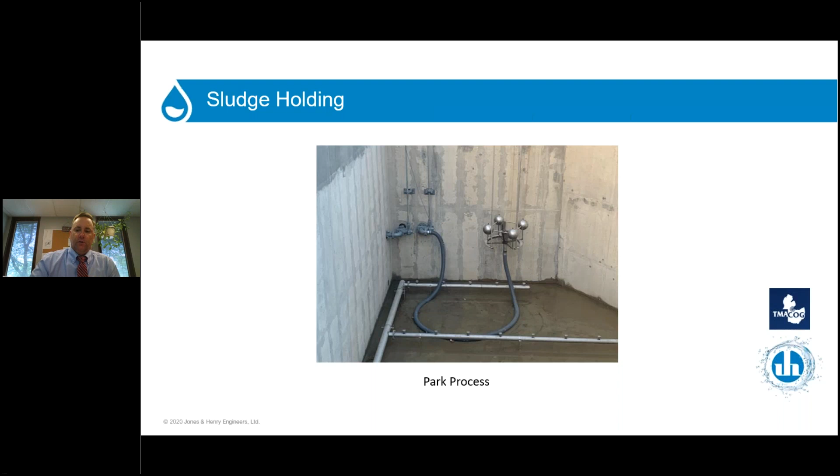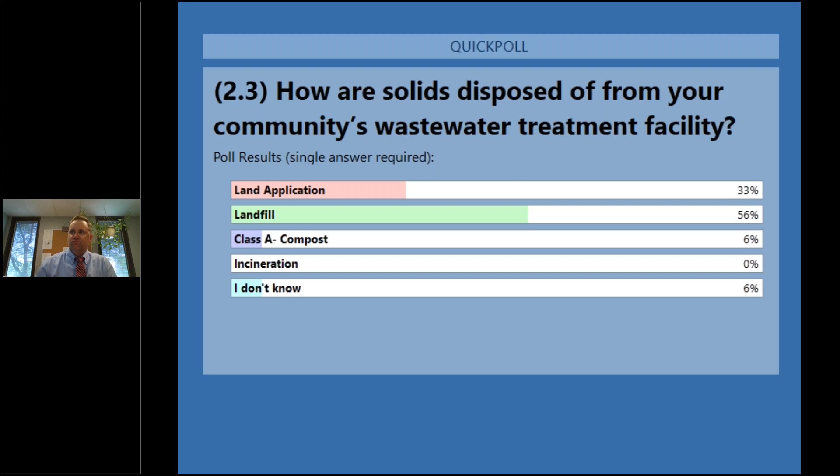So as I said, the Village of Carey was planning on continuing the landfill process, and the existing belt press again was at the end of its useful life. So we investigated all lines of equipment. They didn't want to stick with a belt press because they were having challenges with that and a thinner sludge. So ultimately, we settled on a dewatering press, similar to a screw press, a volute press. So the operational problems with the thinner sludge kind of went away with a screw type press.

And with replacing it, they were able to increase the capacity of the press to better match the plant. The old plant, they were pulling solids out and probably not capturing as much solids because a lot of them were going over to the tertiary pond, and a lot of them were being captured in the EQ basin and being removed there. And they weren't treating for phosphorus, and phosphorus treatment can actually increase your load on your plant when you do chemical feed. So that was one of the key reasons for increasing the capacity of the press then.

The press was actually installed in the place of the belt press in the existing facility, so it really was just a swap out of the equipment.

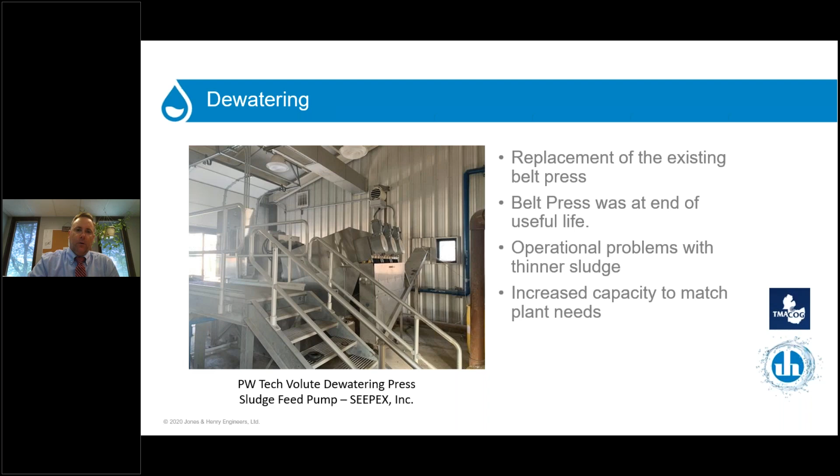With the abandonment of the EQ basins, a lot of that soil was able to be hauled across the stream and dumped into the ponds, and we were able to balance a lot of the excavation out on this project. So that worked out really well.

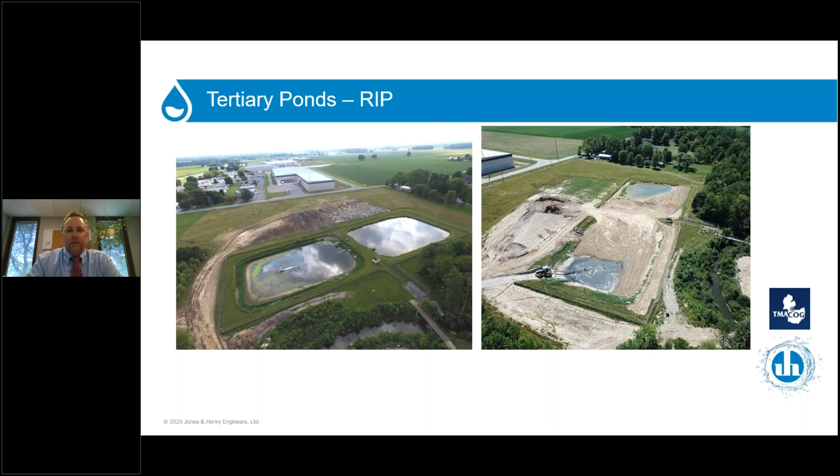Project cost: the original engineer's estimate was $10 million. Bids came in at $10,813,000. The final project cost actually finished under budget, excluding sludge removal. The village kept sludge removal separate on this project, doing it as a separate side cost, though it was included in the project. Sludge removal ultimately amounted to about $1.5 million, but we have to give consideration that they had not cleaned those ponds in the better part of 30 years, so there was a lot of sludge accumulation. That accumulation was so much because the plant was underperforming and not performing like it should have been.

How are we doing on time? About 5 more minutes or so.

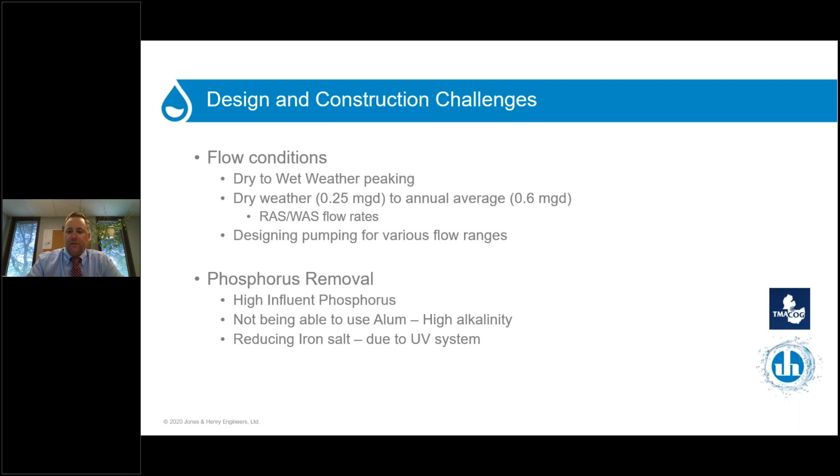Design and construction challenges: flow conditions. The peaking factor was a key design thing. That comes into play when you look at return sludge and waste sludge flow rates. It starts to get a little challenging trying to meet minimum flows and peak flows, resulting in multiple arrangements. Phosphorus removal was again a key element of this project. There were some challenges unique to Carey regarding the alkalinity and the downstream UV system, having to reduce iron salts. So those were certainly a challenge on the project.

The headworks building—something I didn't mention early on—this project had a lot of VFDs on it, and it's extremely important to consider a climate-controlled room when putting VFDs in. We're finding VFDs are becoming more and more sensitive because they're more electronic, so they're very sensitive to heat fluctuations and air temperatures. It's very important to consider HVAC, and I do mean air conditioning, in the electric room. It seems a little overkill in a wastewater plant, but it's important for the level of instrumentation and process equipment being installed now. The pump room in the basement was also climate controlled, more so for recycling air changes and humidity control, trying to maintain a good atmosphere down there to protect the pumps.

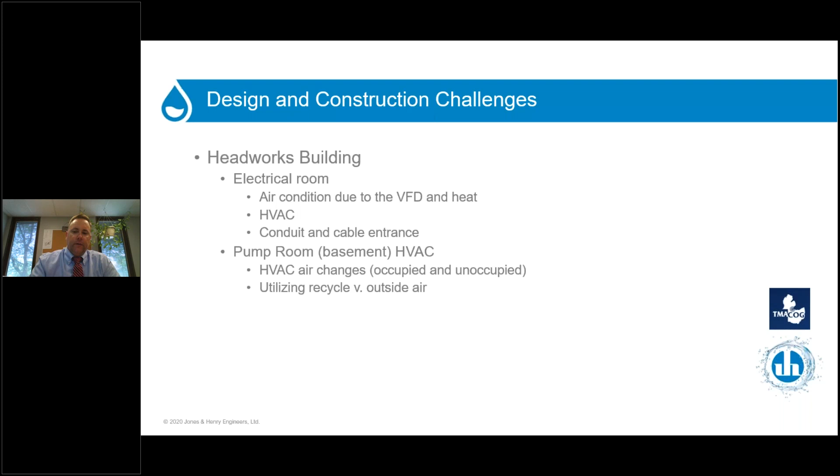Some other site challenges: as I mentioned, the flooding was a huge thing, and relocation of the outfall, plus the location of the new plant on the site—in other words, on the existing plant site. They didn't want to go across the creek from it, which created some construction sequencing challenges. And I've had this question come up before: how did we handle excessive flow with the removal of the EQ basin during construction?

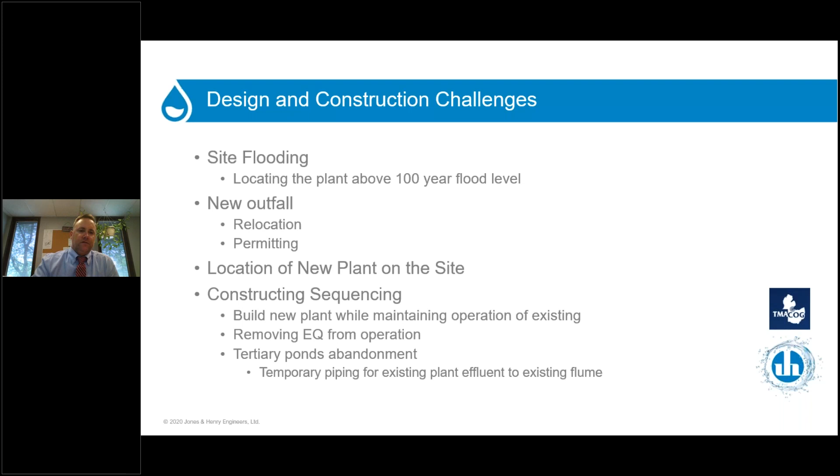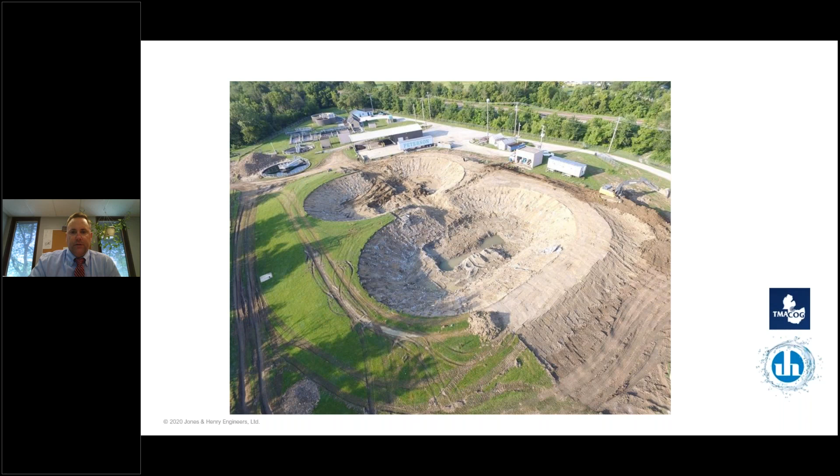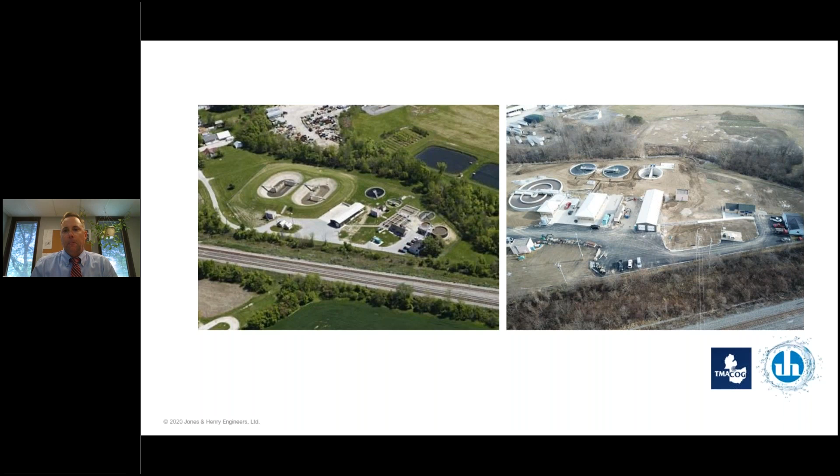And with that, I'll end with a few thank yous. The Village of Carey was very engaged in this project, very important, very integral. Mayor Rathburn attended a number of design meetings and was integral. We met with council a number of times.

Nathan and Jim—Nathan Curtis was the administrator, and Jim Hunter was the superintendent of the plant. Nathan came in the middle of the project after Roy retired. This was actually a lifelong career thing for Roy, who started as superintendent and worked his way up to administrator. Again, a very active and engaged client, which made the project very successful.

A special thank you to Peterson Construction. They did the aerial photos because they did the construction of the project, so they provided the aerial photos for this presentation.

So with that, I guess if there are any questions, I can certainly answer them. I can be reached via email. If anybody has any questions after the presentation, feel free to reach out to me—I'm happy to talk to you.

Well, thank you so much, Pete, for your presentation. It's really fantastic to see the infrastructure changes we have the ability to make at these different sites. Looking forward to seeing how these projects can expand everywhere else around to really help out the needs of all these villages. Unfortunately, we won't have time for any more questions since we're right up against our time limit, but thank you very much, I appreciate that.